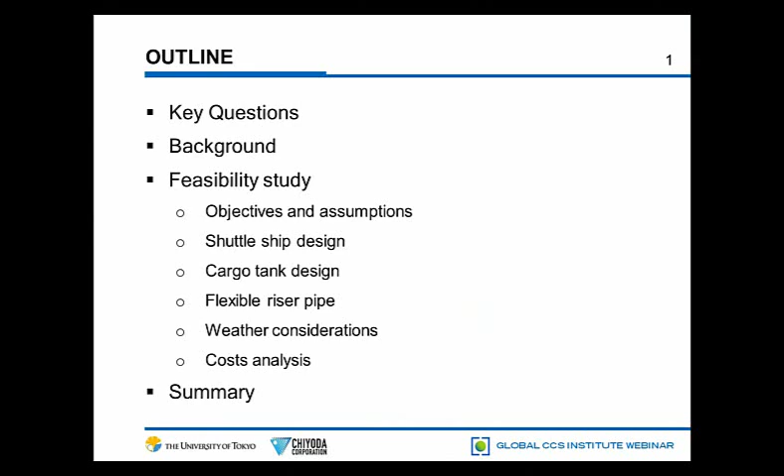These are the key questions that I'd like to try to answer in this webinar. Firstly, what are the major benefits of shuttle shipping for Japan? Secondly, is shuttle shipping technically feasible? And thirdly, is shuttle shipping economically feasible?

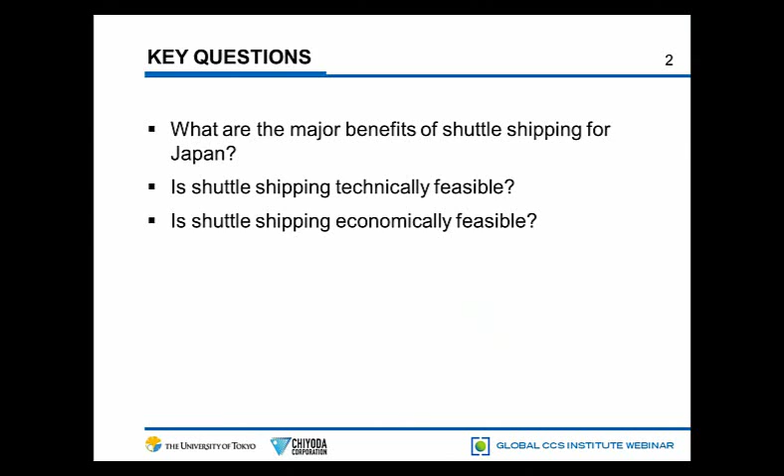Then I'd like to go to the background conditions on CCS in Japan. As a matter of fact, the energy policy of Japan has not been fixed after the crisis of the Fukushima plant in 2011. But from a realistic point of view, measures for reducing CO2 emissions to the atmosphere from the ongoing use of fossil resources are definitely necessary, and the immediate spread of CCS holds the key.

As you know, the land shape of Japan is slender, and many CO2 sources, such as thermal power stations and steel works, are located apart from one another along the coast. It is difficult to secure a mass storage site. Especially, there is poor opportunity to have a geological storage site on land due to concerns for earthquakes. On the other hand, there are high fishery activities near the coast all over the country, and the water becomes very deep outside the coastal zone.

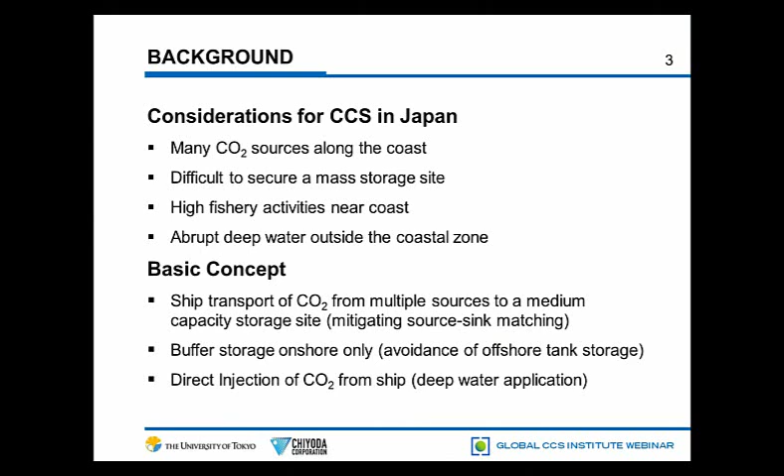So, in order to promote CCS in Japan, we thought ship transport of CO2 from multiple sources to a medium capacity storage site, and direct injection of CO2 from the ship through pipe to the sea bottom, could be a solution. That is, mitigating source-sink matching, the avoidance of offshore tank storage, and the deep water application using ships are the key points of our conception.

This illustration shows a simple sketch of the shuttle ship transport of CO2. Captured CO2 is compressed and liquefied to reduce its volume and temporarily stored in buffer tanks near the port. When a CO2 carrier ship arrives at the port, CO2 is loaded to the ship and transported to the storage site. Then the ship stays within the required region with her position-keeping system, while CO2 is injected from the ship directly to the injection well.

One of the points in our proposal is the frequent shuttle shipping by small to medium-sized ships. The shuttle shipping allows the scale of buffer tanks at port to be small, and the direct injection of CO2 from the ship to the wells allows that no offshore buffer tanks are necessary.

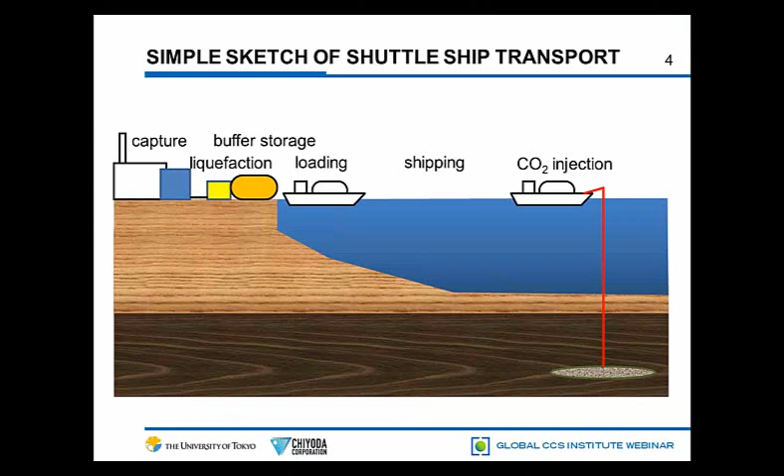The schematic view in this slide describes an example of shuttle shipping application. In West Europe, for example, since it is possible to secure a mass storage site in the North Sea, the size of the source of CO2 recovery determines the scale and the economical efficiency of a project.

Then, the hub concept for enlarging the source of CO2 recovery was thought of, such as the Rotterdam Hub project, and consequently, the way of thinking which builds the main artery of transportation to a storage site from the hub has emerged. The main artery would be realized with offshore pipelines of very large diameter, or with CO2 carrier ships of large loading capacity as much as possible. So, conceptual designs of 50,000 ton ships and even 100,000 ton ships have been proposed.

On the other hand, in East Asia, such as Japan, it is difficult to secure a mass storage site, as mentioned before. Therefore, matching the sources of CO2 recovery and storage sites requires a different approach from the one in West Europe. When a medium capacity storage site is identified, a number of sources will use it, probably despite the distance and the depth of water to some extent.

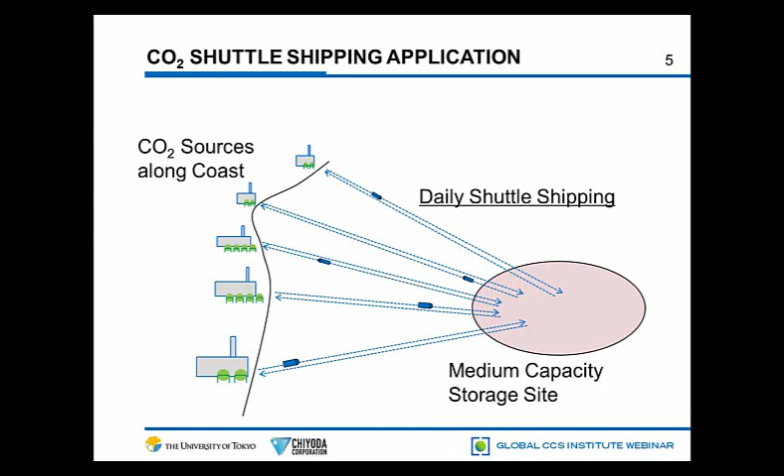This figure shows another example of shuttle shipping application: multiple sources to multiple sites. In this way, a distributed type transportation system should be developed for East Asia rather than forming a main artery. And we believe shuttle transport by small to medium-sized ships would be appropriate for it.

With applying shuttle ships, the route could be flexible. Early startup of the project from a small scale and gradual expansion would be possible. If the capacity of one site becomes short, decoupling and moving to another site would be possible.

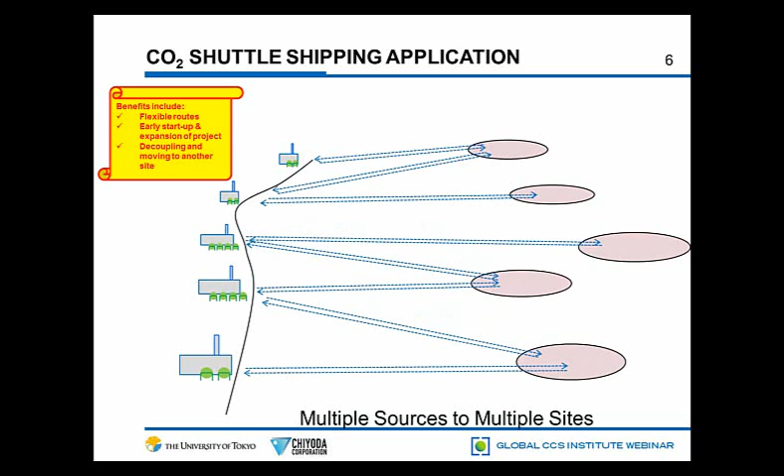Based on such considerations, technical and economic feasibilities of shuttle-type shipping and offshore operation for CO2 injection from the ship to the well have been examined. This project is carried out under the organization shown in this chart. Global CCS Institute financially supports the project, and Chiyoda Corporation is the main contractor as the project manager. Under this umbrella, I am the project leader with the assistance of Dr. Osumi from the Central Research Institute of Electric Power Industry, and several companies join for the study of engineering, operation, and regulations.

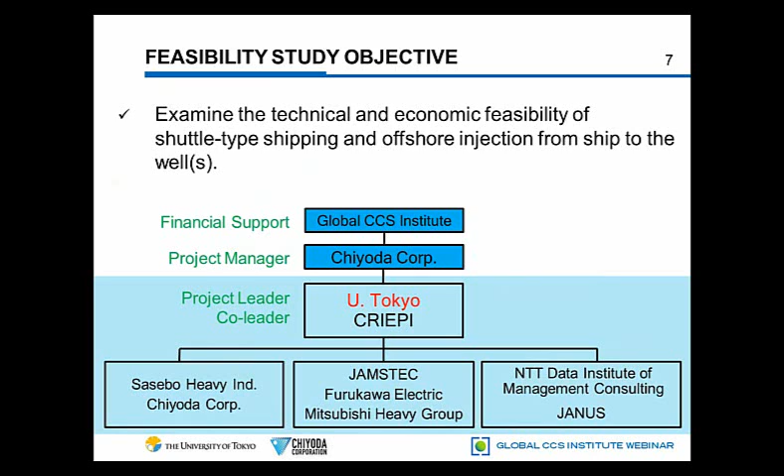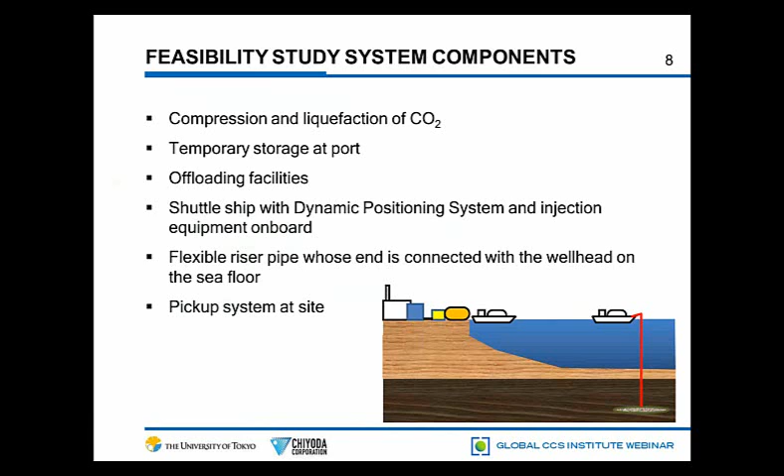The distance between recovery plant and storage site varies from 200 kilometers to 800 kilometers. No storage tanks are placed at the storage site. Finally, it is provisionally assumed that CO2 is injected at 10 megapascals in pressure and 5 degrees Celsius in temperature. These conditions are actually specific to the individual project.

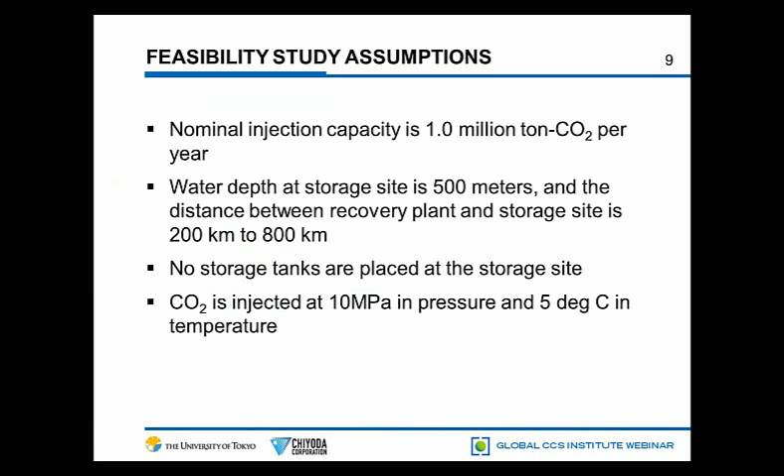From now, I would like to show the major results. At first, the shuttle ship.

We have set up a transportation system for 1 million tons of CO2 per year. That means one day's amount of captured CO2 on average is slightly less than 3,000 tons. Considering the operating rate, we set one day's amount at just 3,000 tons, and decided the loading capacity of a ship is set equal to the one day amount of captured CO2, 3,000 tons.

For distances less than 200 kilometers, 2 ships are necessary in our plan. The time chart described here is an example of an operating schedule of 2 ships, where one of the 2 ships operates at the offshore site on alternate days. Similarly, for distances between 400 and 800 kilometers, 4 ships will be used in turn.

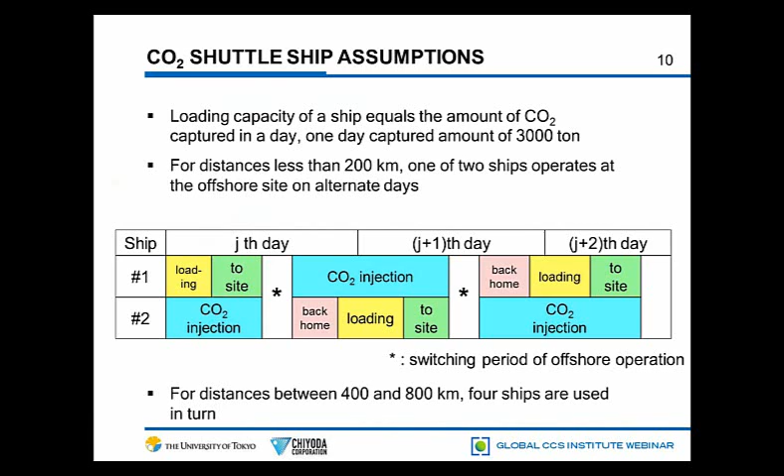This figure shows a general arrangement of a shuttle ship. Length is about 90 meters, width is 14.6 meters, and draft is 5.6 meters. Not so large a ship. Two bilobe type CO2 tanks are mounted in tandem.

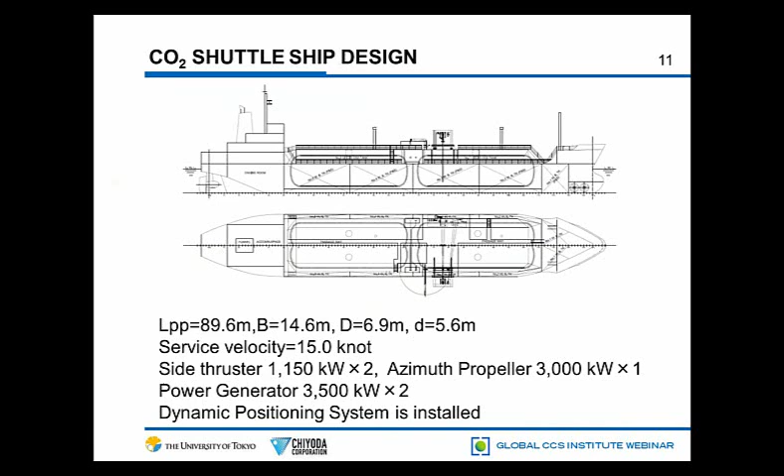The service velocity is 15 knots, that is about 28 kilometers per hour. So it takes about 7 hours for a 200 kilometer transport. A dynamic positioning system is installed for the offshore operation.

In this case study, the cargo conditions of liquid CO2 are set at minus 10 degrees Celsius in temperature and 2.65 megapascals in pressure.

In general, ship designers prefer liquefied gas cargo conditions so that the design pressure becomes low, especially when the ship is fairly large and the transport distance is long. It's because the volume of one pressure tank can be larger when design pressure is lower, and fewer pressure tanks are appropriate to be mounted on the ship.

The triple point of CO2 is minus 57 degrees Celsius in temperature and 0.52 megapascals in pressure. So if the lowest pressure condition is selected, around 0.6 megapascals is enough.

But small to medium-sized ships can hold reasonably high pressure tanks for CO2, and the design temperature can be set fairly higher. In this way, we expect that energy cost for CO2 liquefaction can be reduced. Moreover, heat treating process after construction of the pressure tank or expensive material use can be avoided if the design temperature is not lower than minus 10 degrees Celsius.

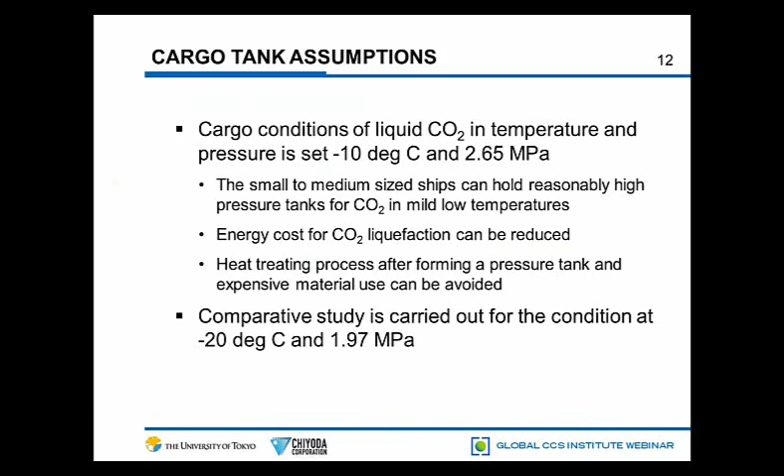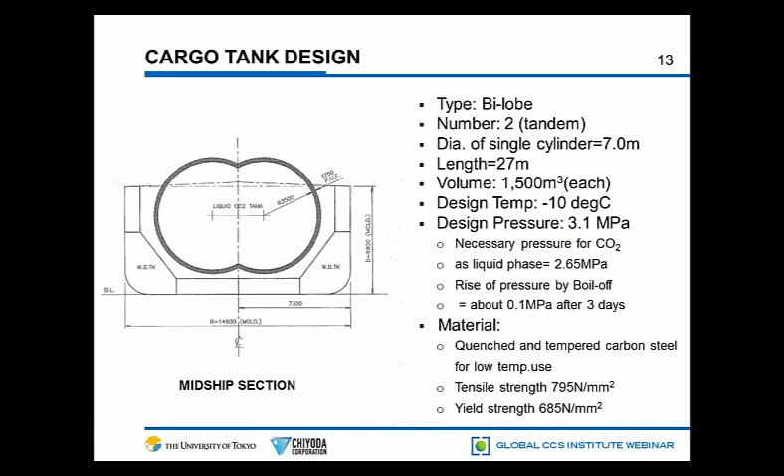This figure shows the midship section of the ship. As mentioned before, a bilobe type tank is mounted on the ship. Heat insulation is important to restrain the rise of pressure in the tank due to the boiling of gas.

The positioning performance of the DPS, dynamic positioning system, has been checked with simulations. In order to minimize ship motion, we assumed the ship heading should be kept toward the waves. Wind direction is generally related to wave direction, so two cases of wind direction are applied to check performance: one is the same direction as waves, and the other is biased at an angle of 45 degrees. Current is usually independent, so the most severe direction, 90 degrees, is applied.

As a result, it is confirmed with simulations that the proposed ship can be positioned within 20 meters offset from the target location during operation when subjected to waves of 3 meters significant wave height, winds of 15 meters per second average speed, and currents of 1 meter per second constant speed.

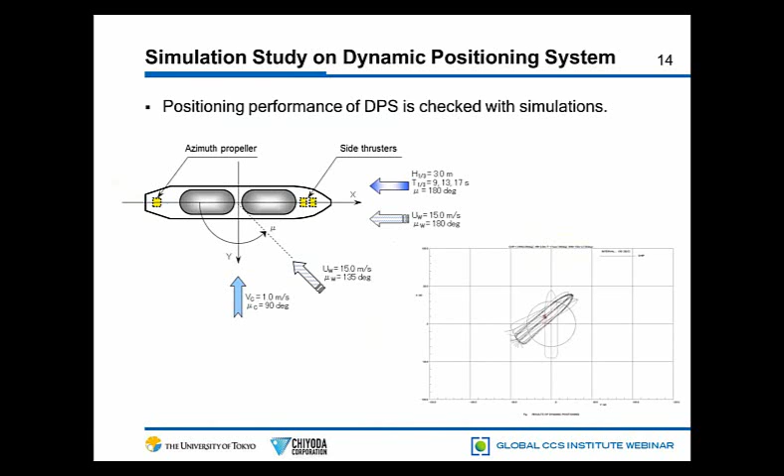Next, I'll go to the flexible riser pipe. For CO2 direct injection from the ship to the well, a flexible riser and its pickup system are proposed in this study.

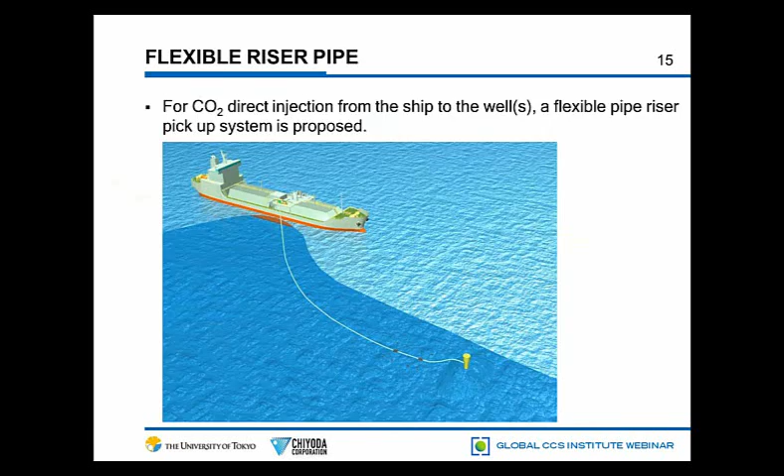This figure shows the author's image of the ship during injection of CO2. This slide shows the schematic view of the system for offshore operation.

When no ships are at the storage site, a flexible riser pipe, whose one end is connected to the wellhead, is laid on the seafloor to avoid severe sea states if they occur. The other end of the pipe is connected with a pickup wire, messenger line, pickup float, pickup rope, and pickup buoy in series.

When a shuttle ship arrives at the site, the pickup buoy is picked up on board by crews, and then the messenger line and pickup wire are wound up. Finally, the end of the pipe is connected to the ship equipment to start the injection of CO2.

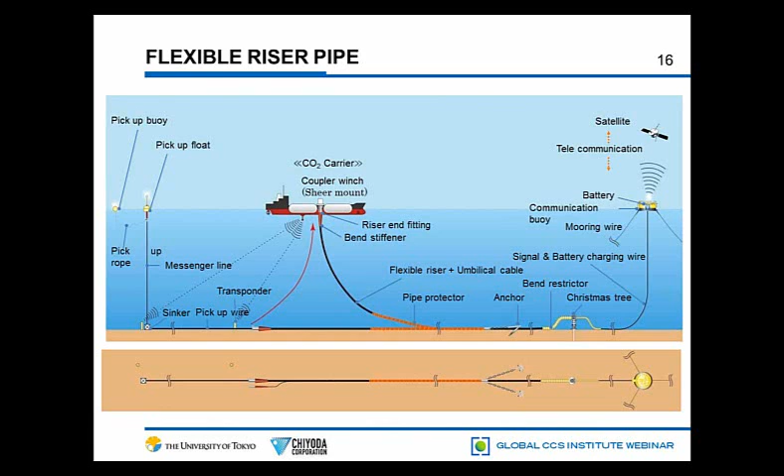Once more again, I'd like to explain the pickup operation using another slide.

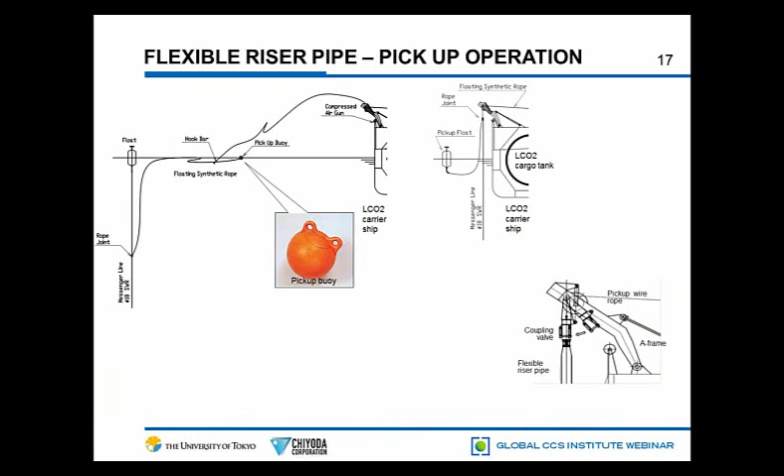The floating synthetic rope between pickup float and pickup buoy is seized with a hook bar or something like that by crews. Then the messenger line between pickup float and sinker, and the pickup wire between sinker and the end of the flexible riser pipe, are wound up one after another. This is one possible measure, and there is room for improvement or introduction of higher technologies.

Allowable sea conditions for the pickup operation have been determined by calculations and also interviews with captains of research ships. As a result, 3 meters of significant wave height shall be the limitation for such sized ship, and the offshore operability off Japan's coast is estimated above 90%.

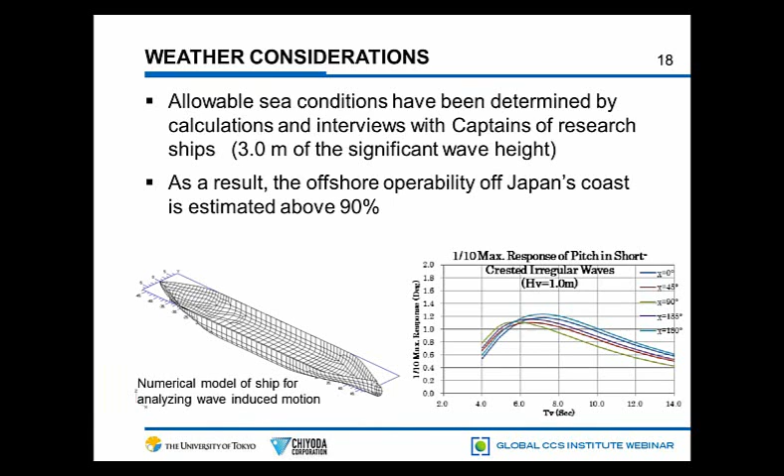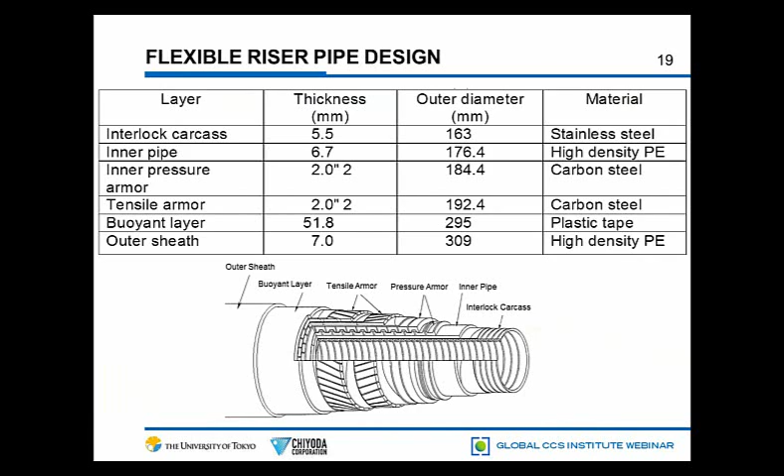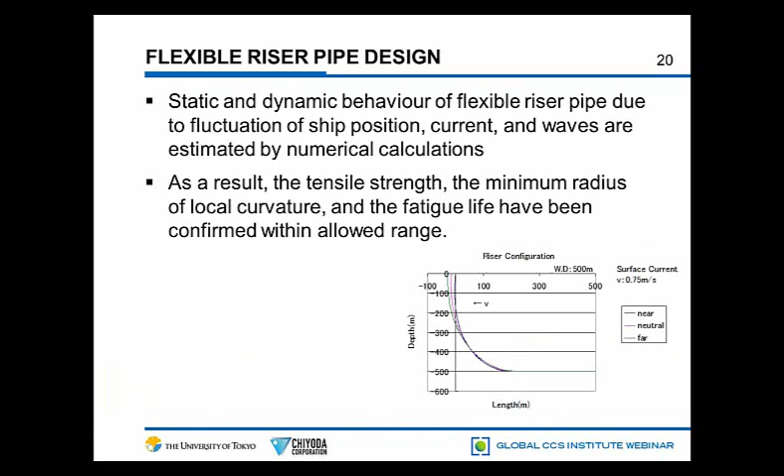In addition, we checked the feasibility of flexible riser pipe use at various water depth sites, and we found that approximately 100 meters and less would be a limitation at the shallow side of water if the positioning performance of the ship is the same.

So, summing up the key technical findings: firstly, the system is technically feasible. Secondly, design considerations allow costs to be minimized. And finally, design considerations ensure offshore operability off Japan's coast at above 90%.

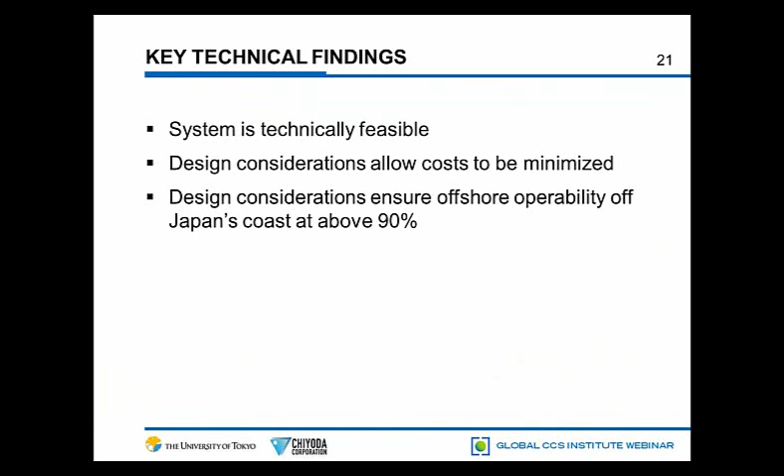Next, I would like to go to cost analysis. As described here, the cost analysis is done for 30 years of injection, and the assumed life of components is 30 years for onshore plant and offshore facilities, and 15 years for shuttle ships. This is a pre-feasibility study, not for specific projects, so there are still many other assumptions. Please check the details in the full report if you are interested.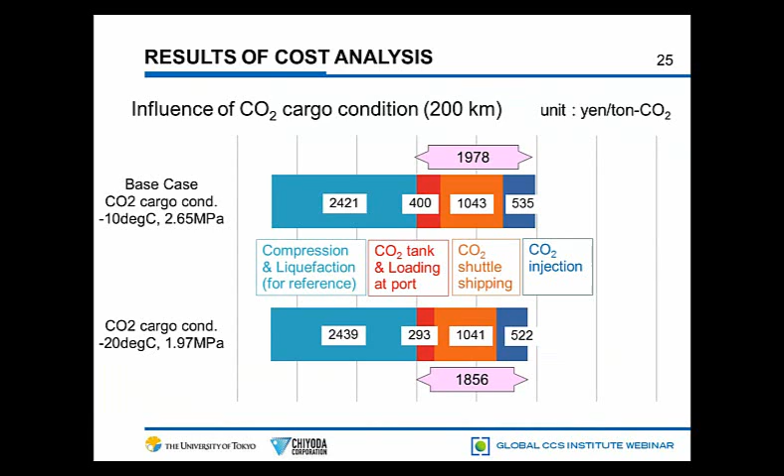Rather, the cost for CO2 tanks at port is higher in the base case. It is because the design pressure becomes higher and total cost becomes slightly higher in the base case. But please take care that the additional cost for heat-treating process after construction of pressure tank, or expensive material use, is neglected in this comparative study.

Next, this slide shows the influence of seawater temperature at storage site in case of 200 kilometers transport. In order to warm CO2 from minus 10 degrees Celsius to plus 5 degrees Celsius before injection to avoid freezing, seawater is used, and some heating system is added if necessary.

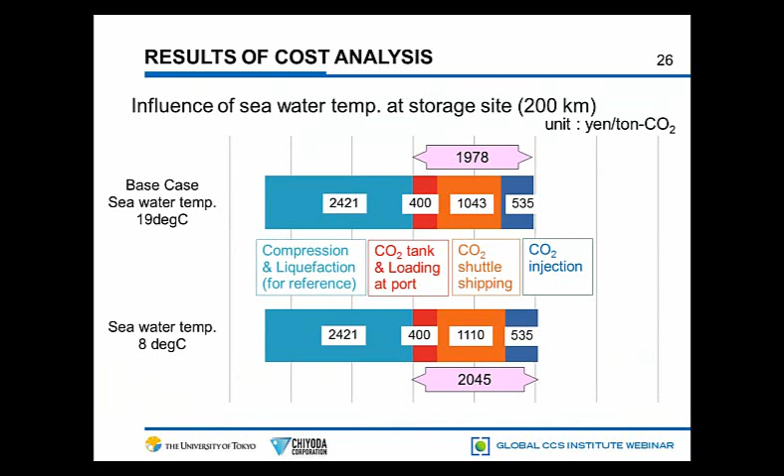Seawater temperature in the base case is 19 degrees Celsius and 8 degrees Celsius in the comparative case. As shown here, there is some cost increase.

So, summing up the key economic findings. Firstly, the system is economically feasible. Secondly, the necessary number of ships is stepwisely increased according to distance, and consequently, the cost for transport is as well. And finally, the share of CO2 compression and liquefaction in total cost is comparatively significant.

Careful consideration is needed because the utility charges, such as electricity, are dependent on the project and very influential to evaluate it.

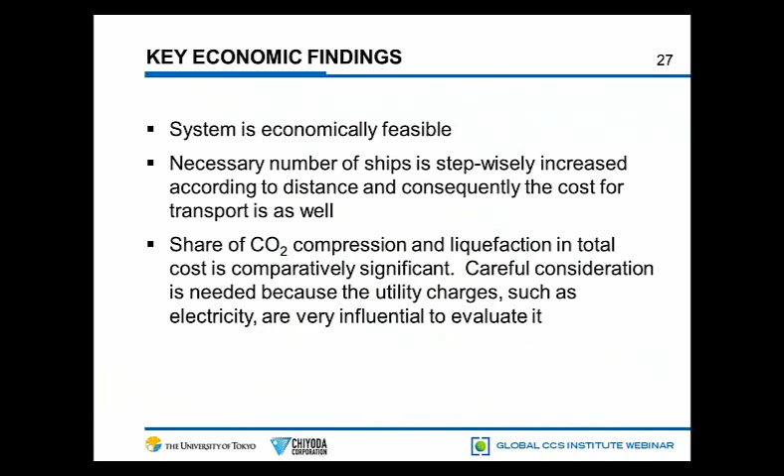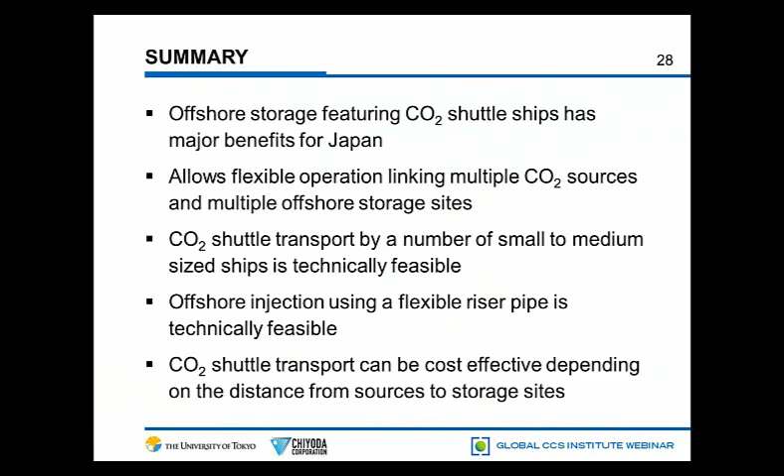This slide is the last one of my presentation for summary. First, offshore storage featuring CO2 shuttle ships has major benefits for Japan. Second, the shuttle shipping allows flexible operation linking multiple CO2 sources and multiple offshore storage sites. Third, CO2 shuttle transport by a number of small to medium-sized ships is technically feasible. Fourth, offshore injection using a flexible riser pipe is technically feasible. And CO2 shuttle transport can be cost-effective depending on the distance from sources to storage sites.

Thank you for your attention. I would like to hand back to Gareth.